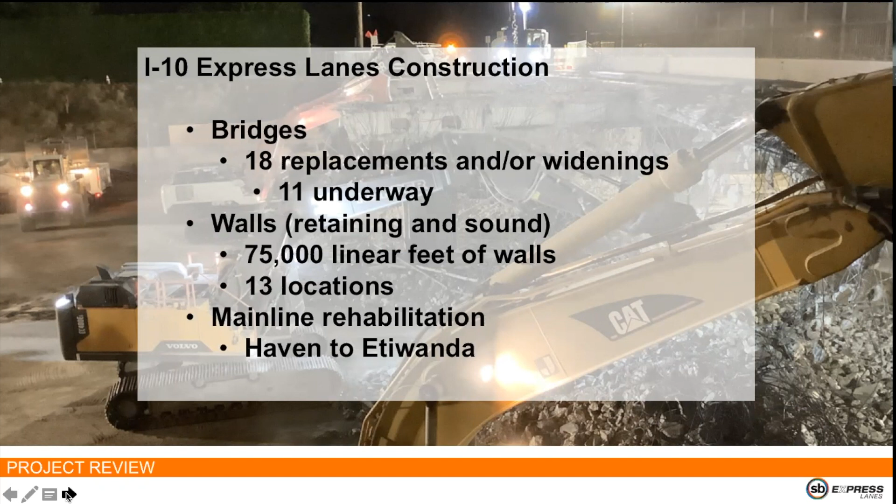A little bit about Euclid Avenue Bridge. The bridge over I-10 is being rebuilt in phases to widen its footprint to accommodate the express lanes. The first phase was the demolition of the east side of the bridge. This occurred in 2020, and it was opened to traffic in March of 2022.

All traffic at that time was shifted to the new portion of the bridge to allow for the west side of the bridge to be demolished. This occurred during nighttime hours just a few days ago, on the evenings of April 29th and 30th. Crews continue to remove portions of the bridge, footings, and walls, and once this work is done, construction will begin on the new bridge on the west side, expected to take approximately 8 months.

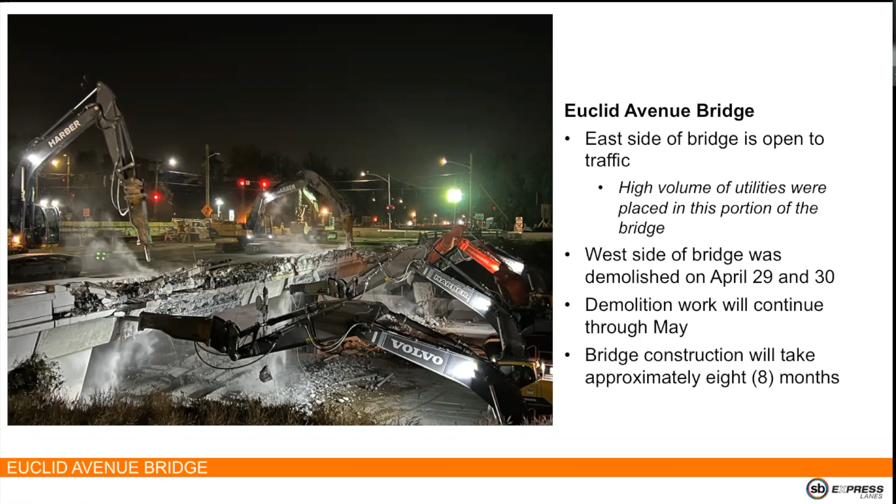This picture is cut up in two. It was taken during demolition. On the bottom portion, there are 6 excavators with hammer attachments removing the bridge. These work in conjunction with each other to methodically remove and break portions of the concrete. The top portion of the picture shows the recently completed portion of the bridge. How cool is that?

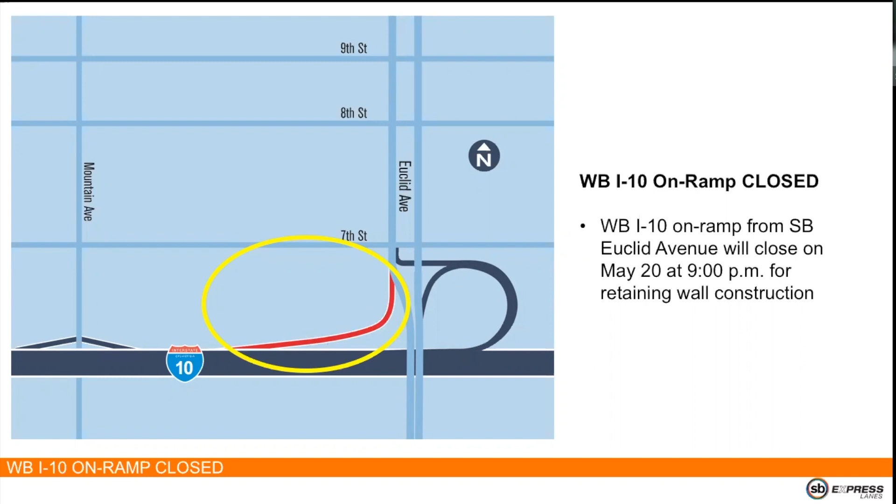So this is why we're here today, to talk about the westbound I-10 on-ramp and things associated with this closure that will occur on Euclid Avenue. The westbound I-10 on-ramp is scheduled to close on May 20th at 9 p.m. for approximately 7 months. The closed on-ramp is shown here in red with the yellow circle around it. We need to close this ramp to construct a retaining wall along the on-ramp, and crews will be working both day and night shifts to complete this work, which is expected to take approximately 7 months.

What's new is how motorists driving southbound on Euclid Avenue, accessing from 7th Street etc., will access the existing westbound I-10 on-loop ramp through a new protected left turn lane. The green line shown here is the new access point. The yellow dot is a new traffic signal that will allow motorists to turn left and access that loop ramp. This change is also scheduled to occur on May 20th at 9 p.m. Of course, motorists can always choose how they access westbound I-10.

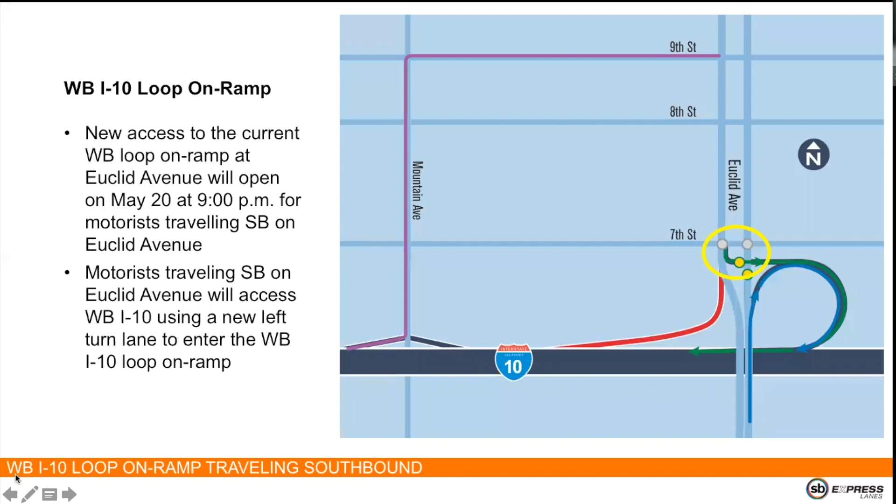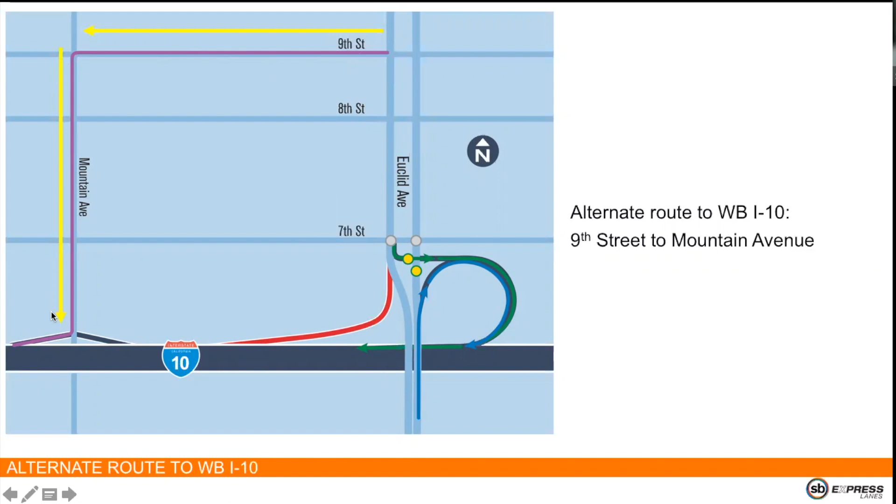Using an alternate route shown here in purple with the yellow arrows, this detour route would be west on 9th and then south on Mountain to enter the westbound I-10. For motorists traveling northbound on Euclid Avenue to access westbound I-10, there are no changes. That is shown here in blue, again with the yellow circle around it.

With this new left turn lane for southbound Euclid Avenue motorists or 7th Street motorists who need to access this loop on-ramp, we need to provide a lane leading up to that new left turn to access the westbound I-10 loop on-ramp. This lane is shown here in the dotted green line with the yellow circle around it, and will begin at 8th Street and extend to 7th Street. All lanes on Euclid Avenue will be moved or shifted to the west, shown here right above 8th Street in orange. This new left turn lane to access the loop on-ramp will be in place on May 20th at 9 p.m.

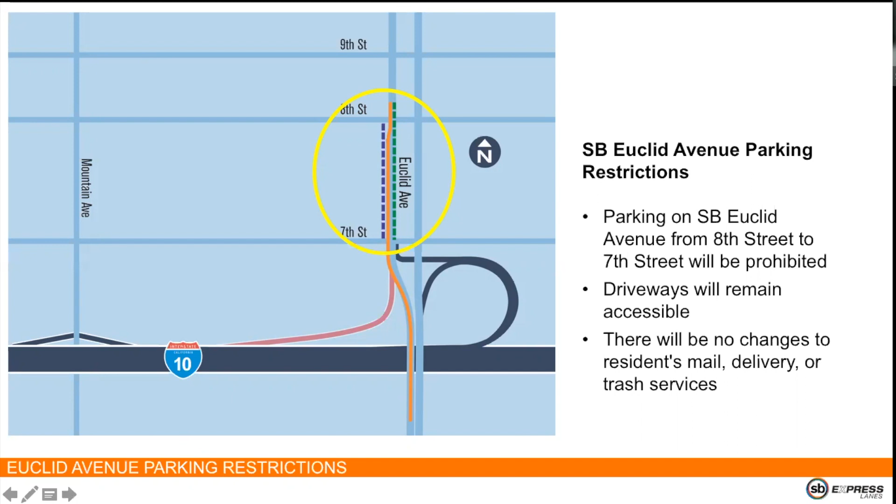Residents on Euclid Avenue between 8th Street and 7th Street will start to see crews out on the street. We need to restripe the street and put some signage up, and all of that will start very soon. These signs, which will go up in the neighborhood, will have information about parking restrictions, including start dates and times for the parking restrictions for this new left turn lane.

We do anticipate that on-street parking will be eliminated on southbound Euclid Avenue, shown here in the blue dotted line with the yellow circle around it, for approximately 7 months. Please know that there will be absolutely no changes to residents' mail, delivery, or trash services while this on-street parking is eliminated.

Now a little bit about how you can get some additional information and be in the know before you go. The next couple of slides focus on our community outreach and tools that are available to help you navigate construction.

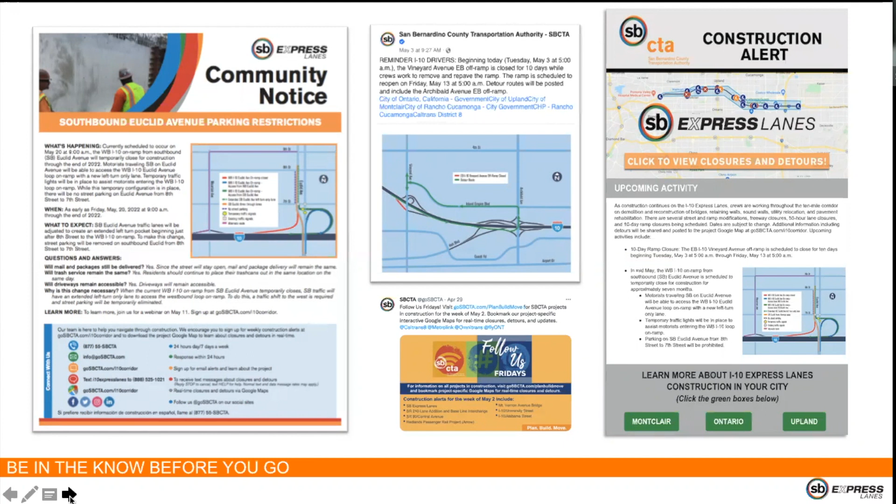At the bottom, you can see that we also have city-specific construction sheets. So if you live in Montclair, you'll want to click the Montclair box, and you can get more information about what exactly is happening in construction in and around the city of Montclair. So those are some neat ways to get information about what's happening in your neighborhood.

As we discussed today, this project has a lot of different operations and activities being performed daily, and closures are required. It's the nature of construction. So we do encourage you to plan ahead and allow extra time to reach your destination, or seek alternate routes to possibly avoid the construction area during this time.

Here are a few screenshots of the project's Google map, which you can access at gosbcta.com/I10 corridor. All real-time closures and detours can be found on this map. You can access it from our website, download it, or bookmark it on your computer or your mobile phone, and it will always provide you with the most updated real-time information on any closures and detours occurring throughout this project corridor.

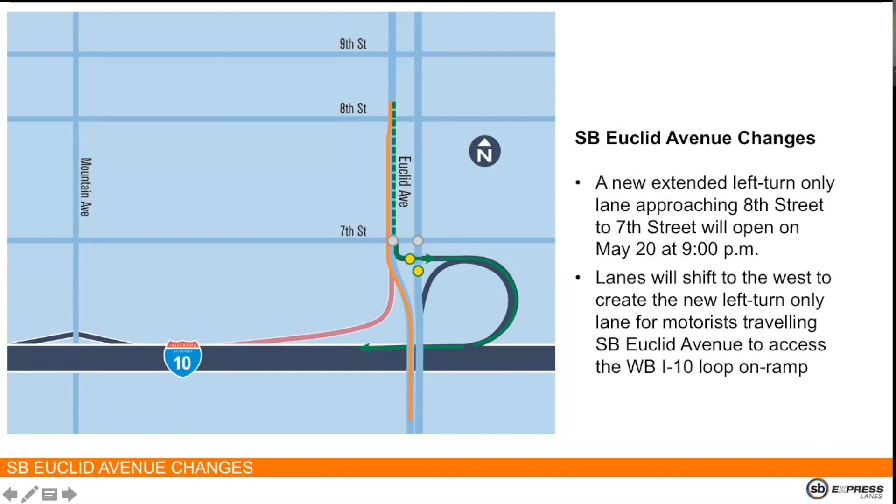So again, these are the changes that will start to occur on Euclid Avenue and the access to the westbound on-ramp. On Euclid Avenue, the changes will occur a little bit before May 20th. You'll see some signage going in, some striping going in for the new left turn lane. Then access to that westbound I-10 on-ramp will be closed on May 20th, and access to the westbound I-10 loop on-ramp will open on May 20th at 9 p.m.